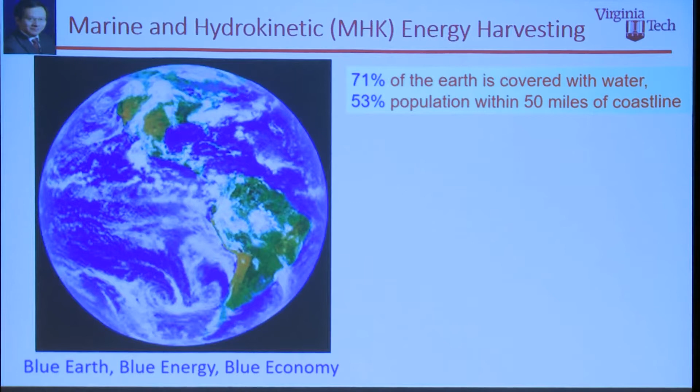So my talk is about ocean wave energy converters. I have two keywords: one is self-reacting, another is mechanical motion rectifier. We're going to say more about that. So the title is Blue Earth. People say this looks like Earth, right? Earth actually means this part. Most of it is water, right? More than 70% is water, and in the United States, more than 50% of people live within 50 miles of the coast. So we should be able to make use of the water energy.

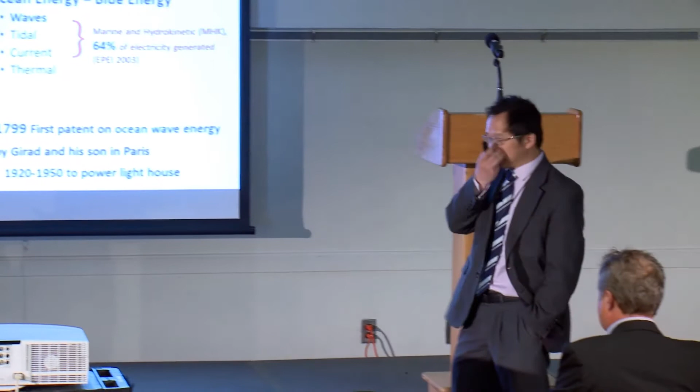For the ocean, there are four types of energy. One is ocean wave energy, then tidal energy and current energy. The fourth is thermal energy, from temperature difference. The first three together are called marine and hydrokinetic energy because wave, tidal, and current are motion, kinetic energy. The first patent on ocean wave energy dates to 1799. However, for 100 years there was no progress. Until the First and Second World Wars, when people used ocean waves to power lighthouses. The real attention to ocean waves came from the two energy crises, in the 1970s and in 2000, when the oil price became very high.

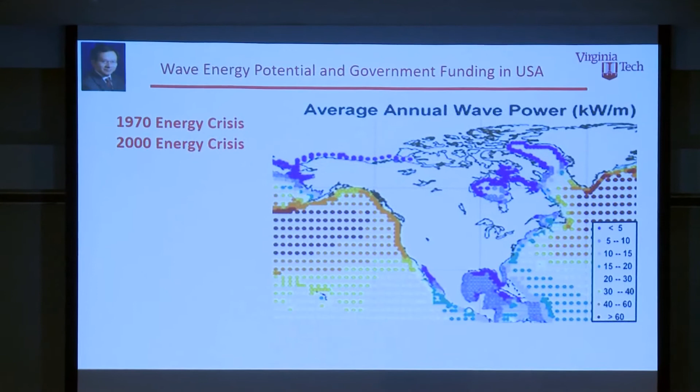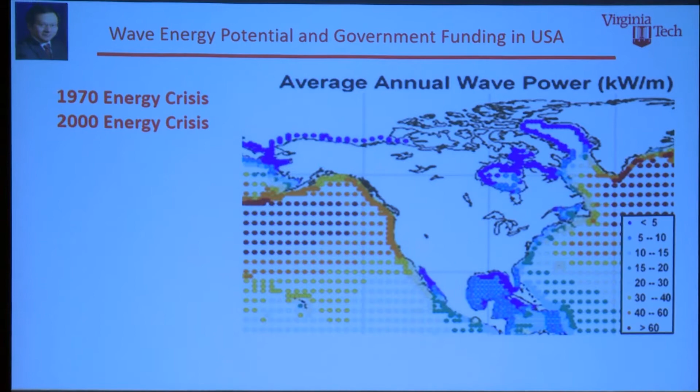Take a look here at ocean energy in the United States. The different colors mean the power density, measured in kilowatts per meter. Boston is around this area; take this as an example, like 30 or 20. That means if you sit on the beach and the wave propagates to you, for a 1 meter wave front the total energy is 30 kilowatts. Compared with solar, like 1.5 kilowatts in sunlight, it's much larger, right? It's also much larger than wind energy density.

So in the United States, our government started on ocean wave energy pretty late. After 2000, the U.S. government started on ocean energy. In 2008 to 2012, they invested on average about $40 million per year. Now, 10 years later, last year, they doubled the DOE's investment. In 2016, DOE created the Water Power Technologies Office. You see how late we are, right? We are far behind some countries, like European countries, in ocean wave research, by at least 10 years.

Anyway, let us take a look at what's going on in the United States: industry, universities, and national labs. In industry, there are about 30 companies. Almost all of them are small companies with only a few people, and the largest is Ocean Power Technologies, with about 100 people. Most of the companies count on government support. So this is industry.

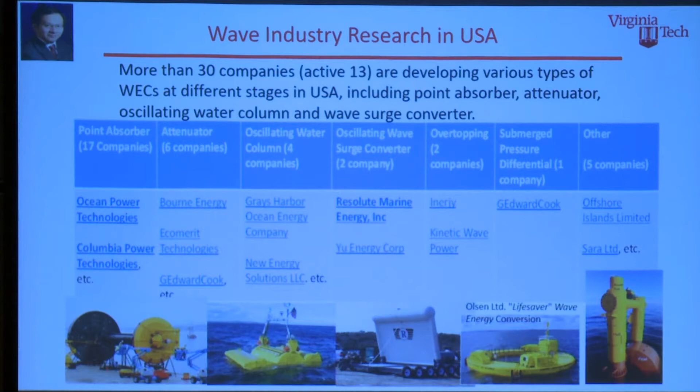On the university side, there are also very few players. At MIT, they spent a lot of time looking into ocean wave hydrodynamics. They didn't directly work on ocean wave energy; however, they made fundamental contributions to understanding wave dynamics and wave-structure interaction. WAMIT, the very popular software, was initially developed by Professor Dick Yue to look into wave and structure interaction. And at UC Berkeley recently, they looked into the wave carpet, this type of structure.

At the University of Michigan, Jeff looks into control, and Mike looks into wave- or current-induced vibration to harvest energy. Oregon State, together with the University of Washington, created the Northwest National Marine Renewable Energy Center, and they do energy research from design to control, as well as one test site under construction. In the United States, the only functional test site is maintained by the University of Hawaii. We got involved in ocean wave energy harvesting research around 2010 when I was at Stony Brook University. Then I moved to Virginia Tech. I'm going to talk more about our research.

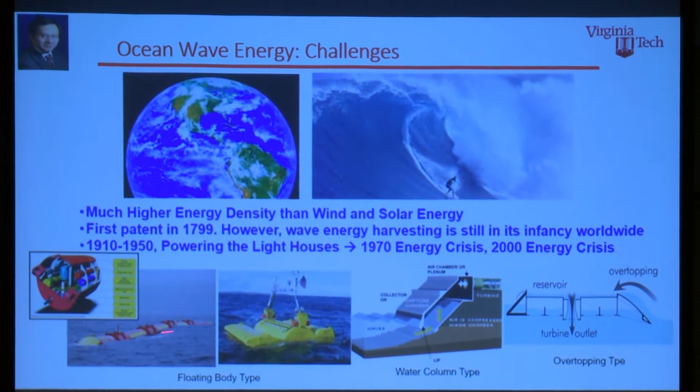So there are different types of technology. Broadly speaking, there's floating type, oscillating water column type, and overtopping type. This is a whole device in the ocean, and it's in vibration, then harvests energy. This is water column type, the water gets into the chamber, moves out, then drives the turbine to rotate in one direction to harvest energy. That is just a regular turbine, getting water to the reservoir, using gravity to generate energy.

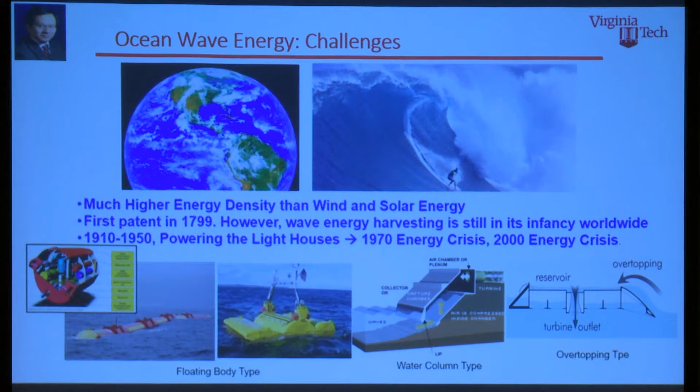So that is the first wave energy farm. It operated 10 years ago in Portugal, but only operated 4 months, then it stopped. It was a utility scale 2 megawatt device, okay, this device itself is not 2 megawatts, it's in an operating array. So why is it like that?

I want to mention Dr. Falcao. Dr. Falcao was a former president of the National Academy of Engineering in Portugal. He dedicated his whole life to ocean wave research and developed the first European Union wave energy converter. In a major review, he wrote about power takeoff. Power takeoff is the machinery that converts mechanical energy into electricity. Power takeoff is possibly the single most important element in wave energy technology, and underlies most failures to date.

Let us take a look at the wave. This is a nice picture, right? From this picture, you can see the feature of this wave. It's very irregular, right? You have amplitude change, frequency change, and this second and next second, today and tomorrow, this season and next season will be different. The variation is much larger than the wind, right?

So this is the first wave energy farm, the utility scale. The design is like that. They're called Pelamis. It's something like this, just look like my fingertip, right? If this moves inside the wave surface, you will draw this one, the tip, the distance change. When the distance changes, they use that to drive a piston.

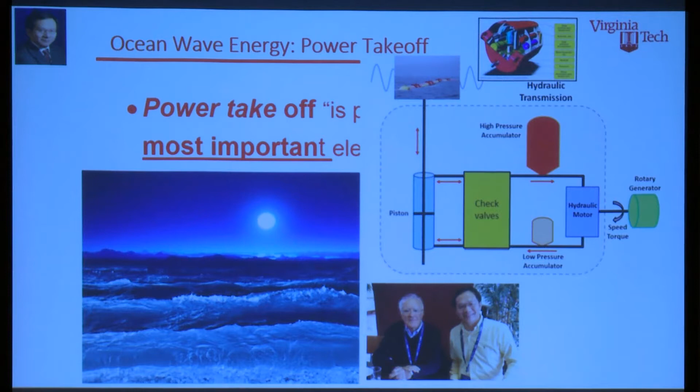So let us say, our innovation - this is a news media report about our work. This is a buoy, and we have another buoy. This is ocean wave with surface wave, meaning here on the surface the amplitude is larger, here the amplitude is smaller. And we make use of this relative motion to generate energy.

Now, just imagine that the relative motion drives a ball screw, and the ball screw drives a gearbox, and the gearbox then drives a generator. The gearbox is a very special gearbox. Can you please play this video?

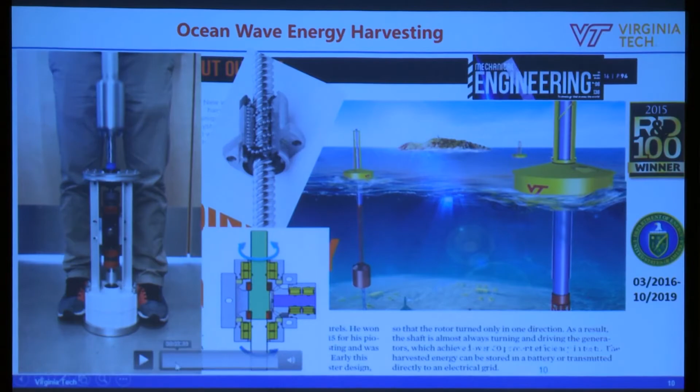You see this ball screw and this gearbox, this two-direction rotation becomes one direction, right? So we convert the two-direction motion into one direction. What are the advantages? On one side, the generator rotates at a constant speed in one direction instead of reversing rotation, so the efficiency is high. Another thing is the reliability is high, and the ocean wave device inside the ocean is very hard to maintain, so reliability is a big concern.

The mechanism, I call it a mechanical motion rectifier, is analogous to the electric voltage rectifier. You have AC voltage, positive, negative, right? Output, when you need to charge a battery or charge your cell phone, you convert it into DC. This is exactly the same as the mechanical motion rectifier. The only difference - there are two differences. One, we use a one-way clutch or one-way bearing instead of a semiconductor diode. The smoothing capacitor becomes a flywheel or rotational inertia.

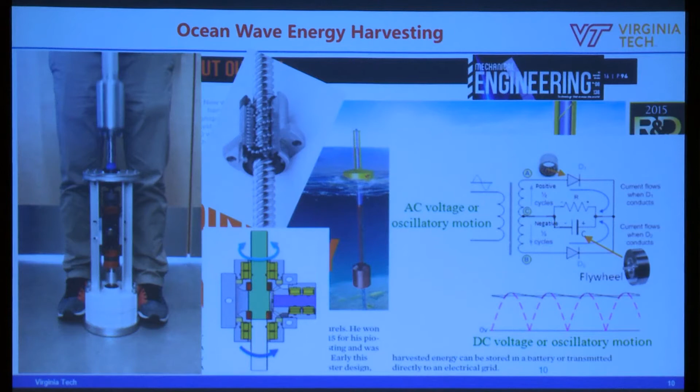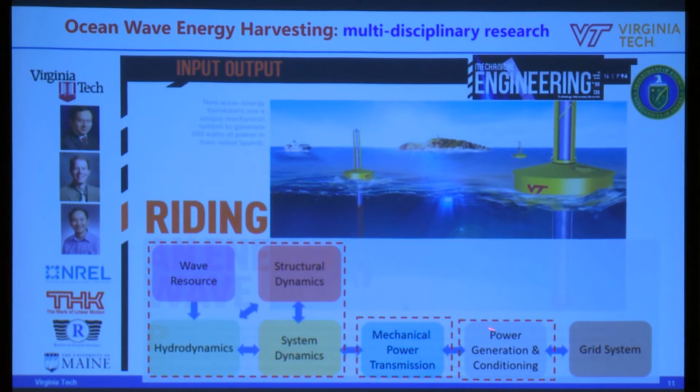So to do the research, we need to consider the wave energy input and structural fluid interaction, convert everything into a mechanical system, then mechanical power takeoff, then convert into electricity and the grid system. Therefore, we need to look into hydrodynamics and multi-body dynamics, power takeoff design, and power electronics and control.

So this is the work scope of this project: design, electronics control, hydrodynamics and dynamics, as well as test.

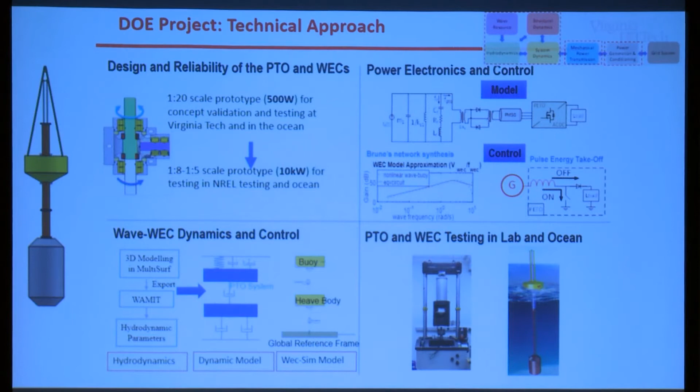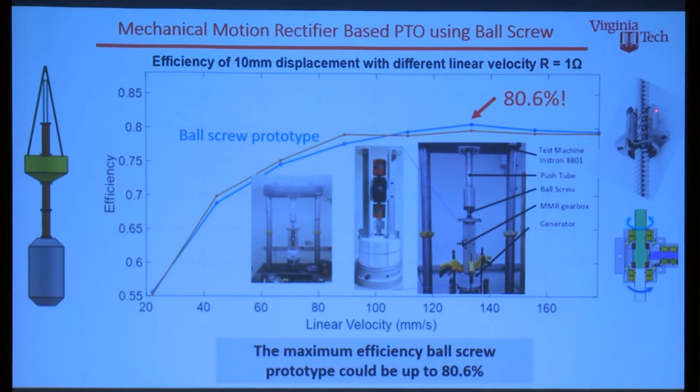This is a 500 watt prototype PTO we built. We put it in the test machine with material compression and extension, and we get more than 80% efficiency. As a reference, hydraulic system energy converters at a similar scale get 20% efficiency. That's mechanical energy to electricity output, including the loss of the ball screw, gearbox, and generator.

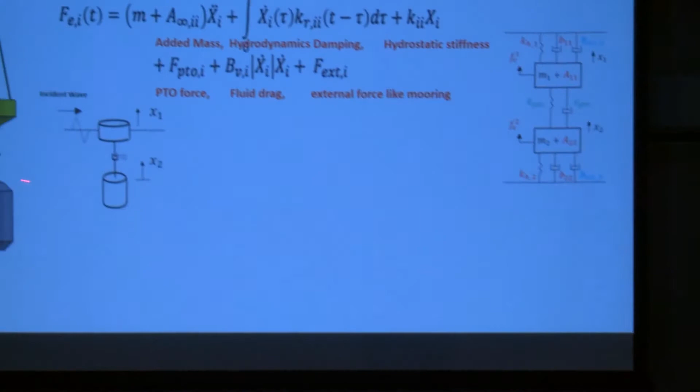Another thing, as I mentioned, is the dynamics. We talk about a two-body system instead of one body. We don't fix this to the seabed. So we can write the multi-body dynamics.

It's actually very similar to what we teach undergraduate students in a spring mass system. The only differences are three things. One is added mass, because the water surrounding the buoy is moving up and down also, creating an additional mass effect. We have hydrodynamic damping, which propagates and we lose energy. The excitation force is also frequency dependent. All three parameters—added mass, hydrodynamic damping, and excitation force—are frequency dependent. Everything else is the same as the spring mass system.

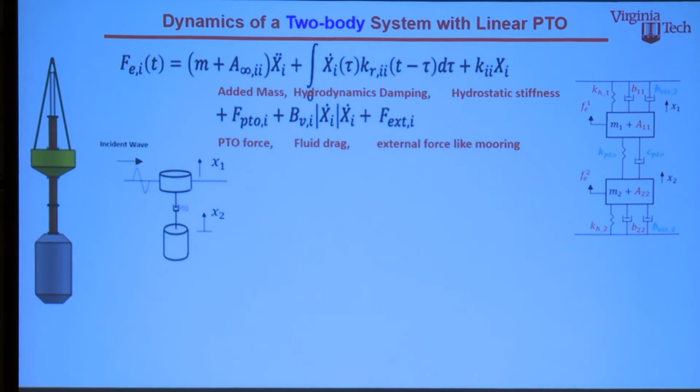So we can find a closed form solution for the best parameters, for example the mass ratio. To generate more power, if this mass is small, the energy is not much. If this mass is very large, this mass will almost not matter—you get the same result as a single mass system. That's the best mass ratio, and this mass is usually much larger, including both the physical mass and the added mass together.

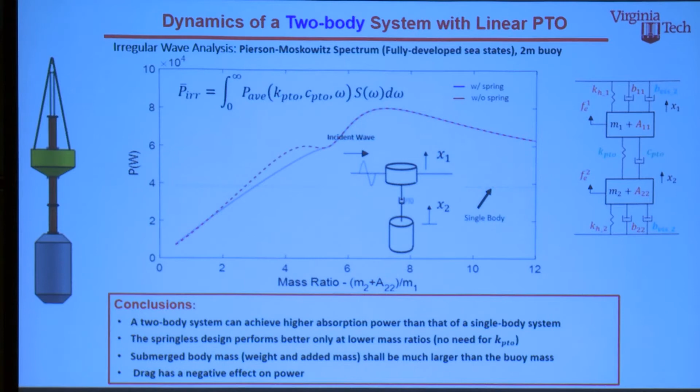Ocean wave energy harvesting itself is a vibration energy harvesting system. To get the best result, you need the excitation frequency and the natural frequency to be the same, and you need to match the damping—electric damping and mechanical damping should be the same. Similar to batteries, you have inner resistance and external resistance, and you make the two match.

Unfortunately, in the ocean wave system, we cannot achieve that. Ocean wave frequency is very low, 0.1 to 0.2 hertz. This is a vibration system—if you want to achieve 0.1 to 0.2 hertz, this buoy needs about 50 meters, which is not practical. So this buoy's natural frequency is usually much higher. Another thing is the system works very well at resonance, but outside resonance the energy gets significantly reduced.

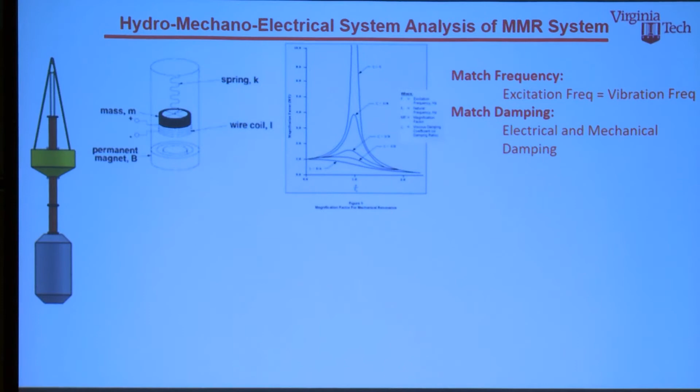So now look at it—instead of a simple linear system like a spring mass system, our system has a mechanical motion rectifier on one side. This mechanical rectifier creates a nonlinear rotation effect, meaning the input is one direction, but with two input directions, the output is one direction. It looks like a flywheel, but it's nonlinear mass. As a result, you can have broad bandwidth energy harvesting—if the resonance is off-tuned, you still have good energy harvesting effect.

Another thing, if you look into a two-mass system through optimization, you'll find that the drag damping has significant influence—that happens at low period or high frequency, and also at high period or low frequency. So the drag damping has significant influence on the system.

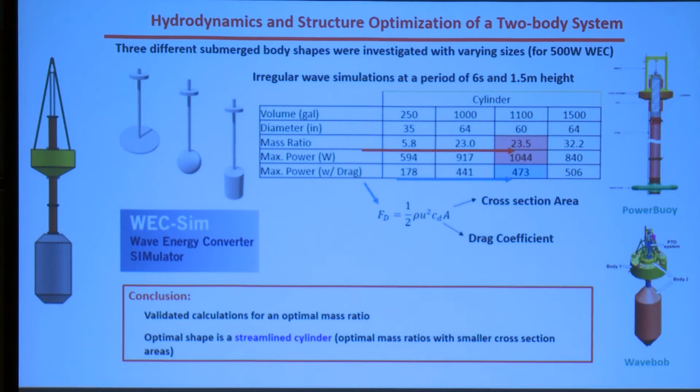Anyway, let's look at the tank test results. We did tank testing at University of Maine's civil tank, testing a one-body system, a two-body system, and a 6-degree-of-freedom system. The one-body system is basically a fixed column where the buoy moves up and down. In the two-body system, the tank is free to move.

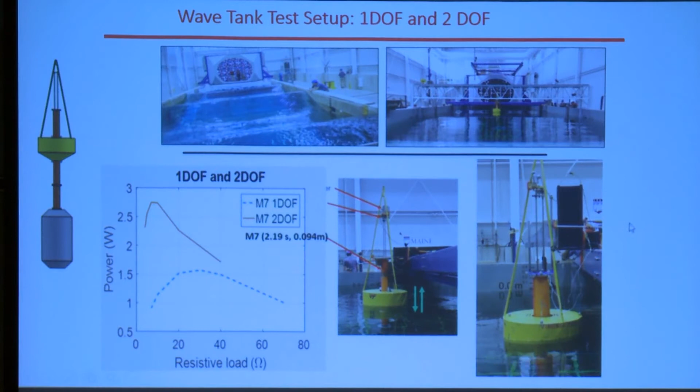If you look into the natural frequency, it doesn't mean the combined natural frequency will match the excitation frequency. However, the physical meaning can be better, because the damped natural frequency will match exactly the excitation frequency. This is why the 2-degree-of-freedom system can double the power output.

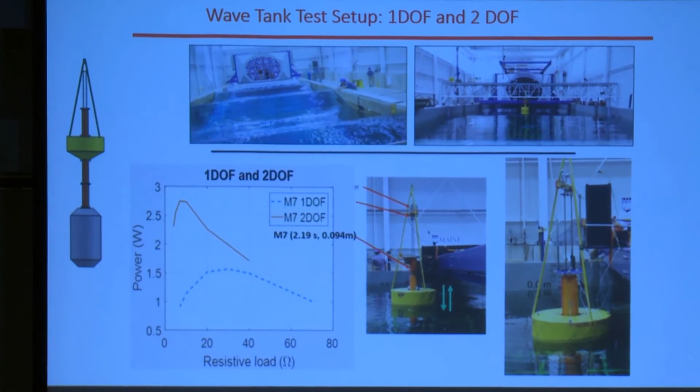Actually it can achieve better, and this is a 6-degree-of-freedom system. The buoy can have 6 degrees of freedom, and this tank also has 6 degrees of freedom.

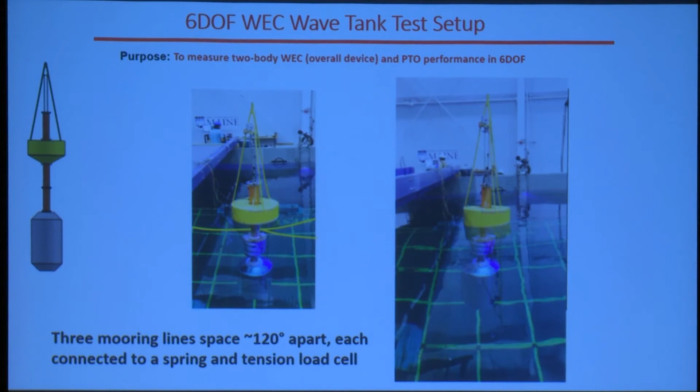I'll skip this video, we have a video here too. Okay, so it's fine. One important thing is the capture width ratio.

Capture width ratio means how much energy from the wave is converted into mechanical energy. In this experiment, we tested irregular waves, and wave energy density means how many kilowatts per meter. We get more than 50% capture width ratio, meaning more than 50% of wave energy is converted into mechanical energy. Compared with the literature, like NREL's reference model 3, which is the ocean power technology system I showed you, they have about 16%.

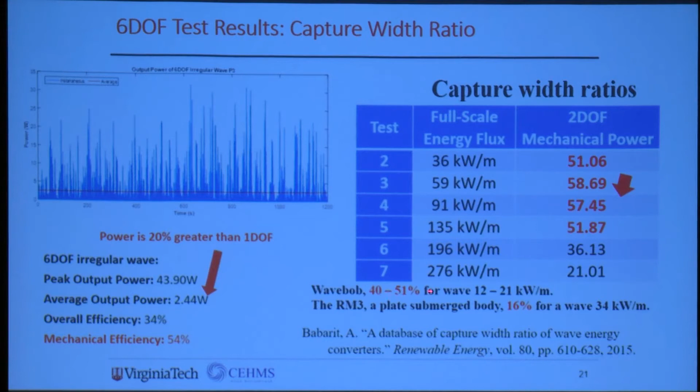So this is much higher. The highest we found in literature is 40 to 50%. So we also looked into the modeling.

I mentioned the design is analogous to a mechanical-electric rectifier, a mechanical rectifier. However, the system inside has mechanical transmission, it involves friction, it involves compliance. Such a system cannot be represented by the ideal diode.

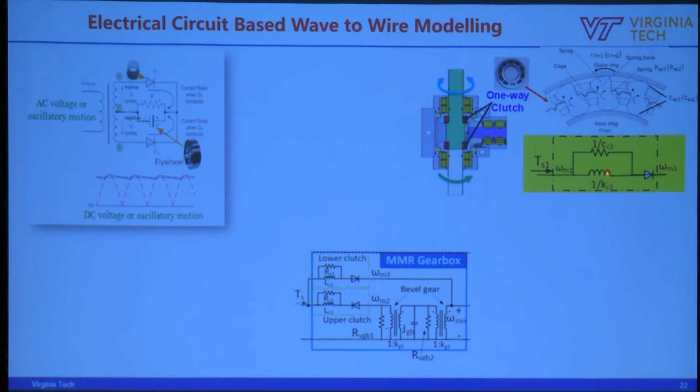We can convert everything in the mechanical domain into the electric domain, so that's the conversion. In this mechanical motion rectifier, if you look into the compliance, this is compliance, and this is friction. You can represent this in the electric domain.

In the system you will have friction, you will have a coupler, which involves compliance too. So this system, you can use an electric domain model for the friction and coupling effect, and this is the motor too.

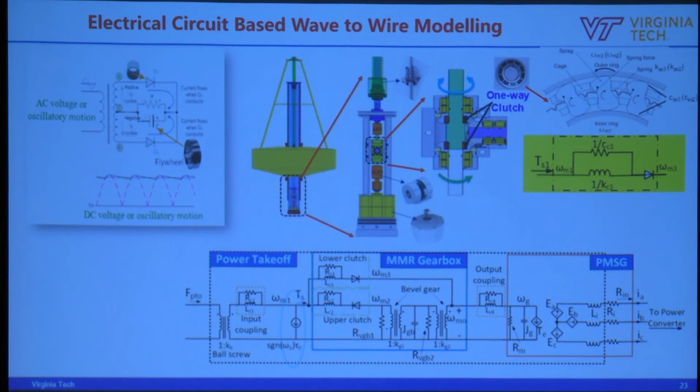Likewise the buoy and fluid-structure interaction, you can also convert that into the mechanical domain, electric domain, including the frequency-dependent radiation damping and frequency-dependent mass. That's just an electric circuit. Now we can convert everything into the electric domain, including the frictions, viscous dampings, inertia, and compliance.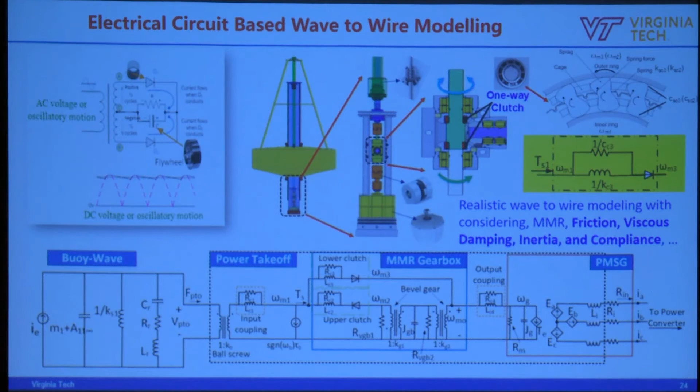With this configuration, we can go ahead and do the control and power electronics design. This is the power electronics. As I mentioned, ideally if you want to harvest energy, you have to match the impedance. The generator's impedance includes the resistor and inductor, and ideally the best resistor is the conjugate of these two.

In this power electronics design, we take advantage of this inductor, making it a DC-DC converter's inductor. There are more details in the paper.

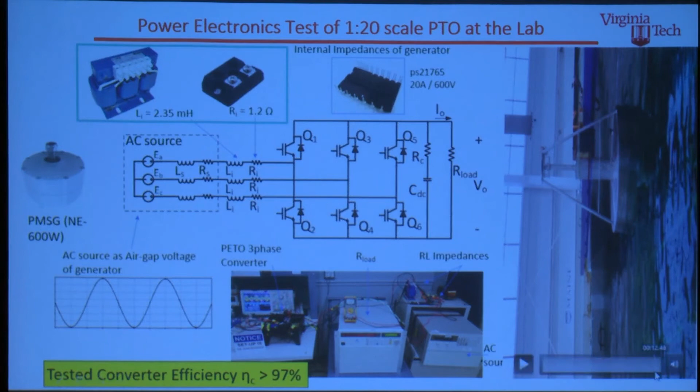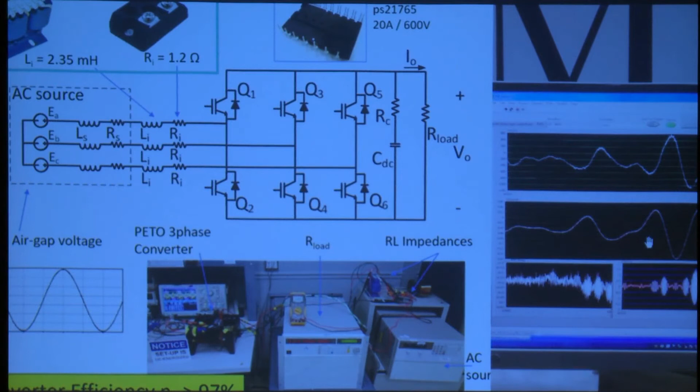Can you click this one? Can you click the video? Okay, this is a 1 to 20 scale. You moved too quick. Anyway, it's fine. Time's up. Sorry, let me continue. It's fine, it's okay. Just go to the next page, please. Just click next page, it's okay. The computer is slow, okay, just okay.

Overall, this is the power electronics. The efficiency itself is 97%.

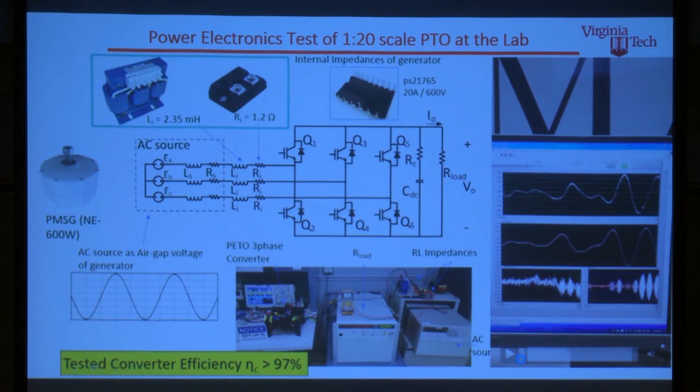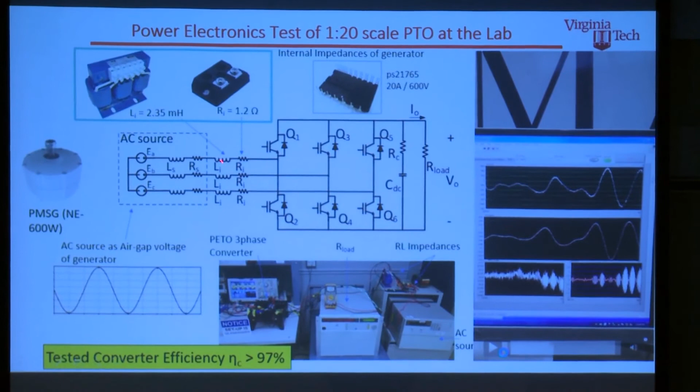Next, we compared the power output of this DC-DC converter and a pure resistor. You'll find that with this DC-DC converter, the power output can be 2 times more. The reason is that with this DC-DC converter, we have feedback control, we control the duty cycle, which cancels the effect of this inductor.

Okay, so it didn't... wow. Looking like it, okay.

And this is the ocean wave energy system we talked about. We also extended this ocean buoy concept to the wave surge device. And what about the wave?

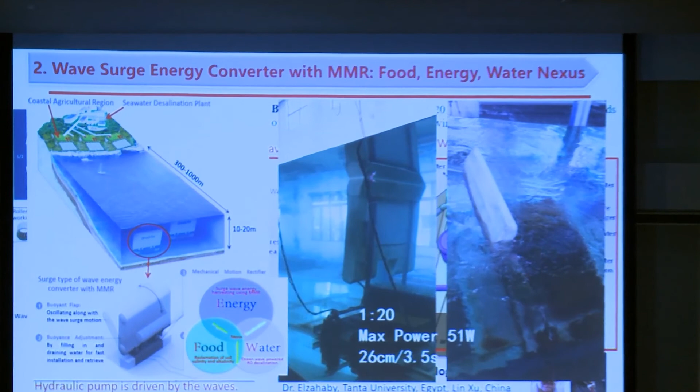This wave energy surge device, we worked on under a collaborative project funded by USAID in collaboration with Egypt. We would like to use ocean waves to pump reverse osmosis water for desalination, then use that for food and agricultural purposes.

We have some video, but I'm not going to show it. This device, this wave surge device, is special for shallow water applications.

And look at this design. This is interesting, almost the end of the project presentation. This one is a motion rectifier I showed you. That's a one-way clutch. Now we add another one-way clutch here.

Then what happens is the buoy can drive the generator, and the turbine also can drive the generator at the same time. These two will be independent through this coupling. What I mean is the buoy will not be able to drive this turbine, and the turbine will not drive the buoy. However, they drive this generator shaft together.

The advantage is we can significantly reduce the peak to average power ratio, since we have two inputs, and when this is small, this will take over. They compensate each other. LCOE can be significantly reduced. Now my students are doing experiments in Stevens Institute's wave tank this week.

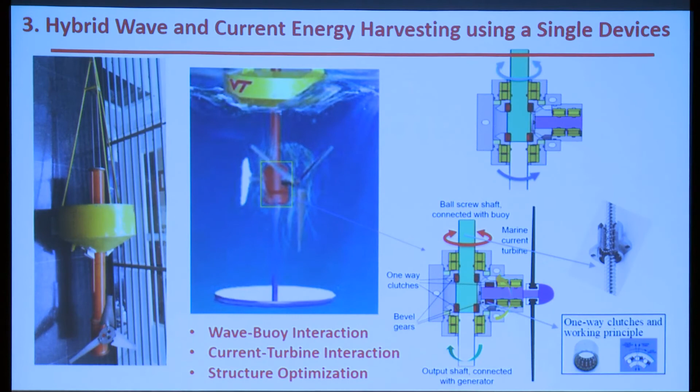So this is the summary. I talked about the mechanical motion rectifier-based ocean wave energy converter. I talked about the two-body wave converter design and why it works: because they have a combined system, the natural frequency will be able to match the wave frequency. We did a wave tank test, and we also had some ocean tests. For ongoing work, we built a 10 kilowatt system, sent to NREL, and it is in test on NREL's dynamometer.

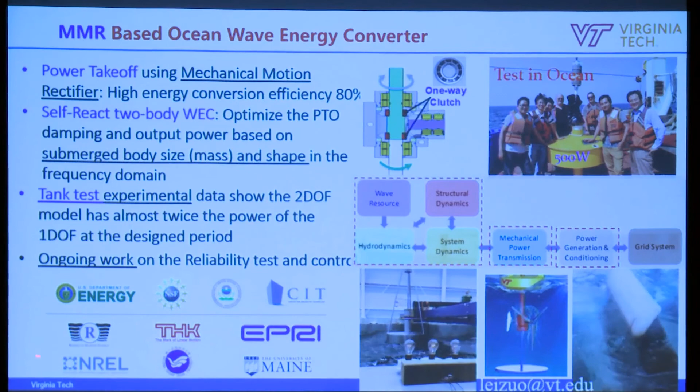In addition to wave energy harvesting research, my group also works on different scales, like civil structural energy harvesting and vehicle energy harvesting, and small scale energy harvesting for sensing applications.